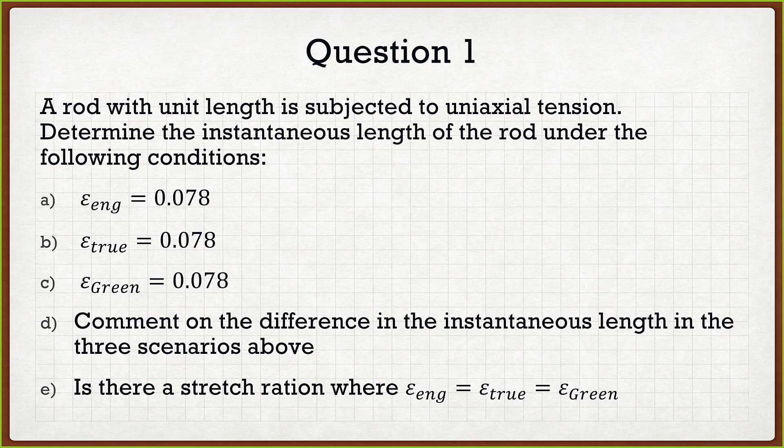And then finally, E says, is there a stretch ratio where all 3 strains are the exact same? So we're going to go into the formulas and try and figure out, is there a scenario where this holds true? The best way to do that is just to look at each strain measure. So for the engineering strain, it's going to be lambda minus 1.

For the true strain, it's going to be the natural logarithm of lambda. And for the green strain, it's 1/2 lambda squared minus 1. So if we look here, it's actually a simple question because in all 3 of these formulas, we're given the strain and our only unknown on the right-hand side is lambda. So all we need to do is solve for lambda using these 3 different formulas.

The only trick you have to be aware of in exams, because it's not going to apply here, is that lambda is our stretch ratio. It's not our deformed length, okay? The question's asking for the deformed length, not the stretch ratio. So what we would do is find lambda, and now that we found lambda, we can find its current or deformed length, because lambda is simply the current length divided by the original length.

Now in this question it's nice because since our original length was 1, it's a unit, our stretch ratio lambda is actually just going to be the same as the deformed length. So all you guys need to do in this question is figure out lambda and then figure out the deformed length, but since it's a unit length, they're going to be the exact same. So how does that sit with you? Is that pretty good? All we have to do is find lambda, and that's basically going to be our answer for A, B, and C.

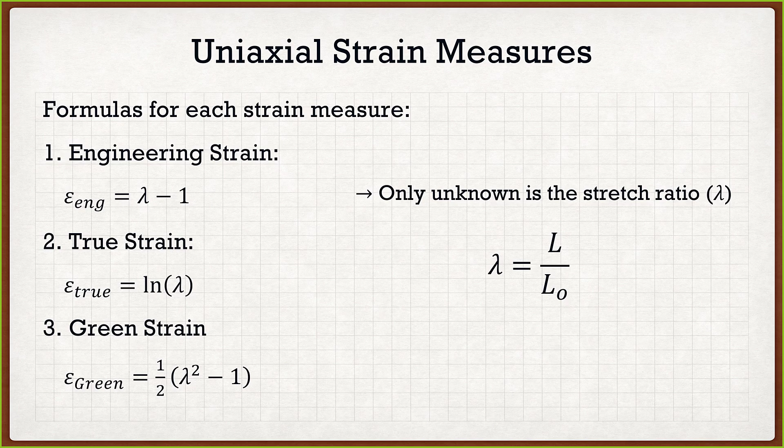So yeah, that's going to be the one and only case. That's going to be question 1. Any questions or concerns with question number 1? Or are you feeling pretty confident? No, looks good. Perfect. So let's go to question 2.

Question 2 has the trickiest question in the entire assignment, but after that, it's pretty simple. Question 2 says a cube undergoes a deformation such that the infinitesimal strain is described by, and as we can see, we have a second order tensor, or a 3x3 matrix. Now, whenever you see the word infinitesimal strain, it's the exact same as saying small strain. So my small strain tensor, that's the same as my infinitesimal strain tensor. It's just a different word for it.

And from this strain tensor, it wants us to determine 4 different things. The first one is the principal strains and their directions. The second is the longitudinal strain along the direction of the vector dx, which is 1, 1, 1. The approximate change in angle between the vectors dx and dy, which is -1, 1, -1. And finally, the coordinate transformation matrix Q that transforms our small strain tensor into a diagonal tensor, or a diagonal matrix.

So before we get into B and C, because those are going to be the tricky ones, let's look at A and D. They both have to do with principal strains. Now, my question for you is, what exactly are principal strains? Principal strains, principal stresses, they're all related to something very important that we talked about lots in our linear algebra. Do you remember what it is?

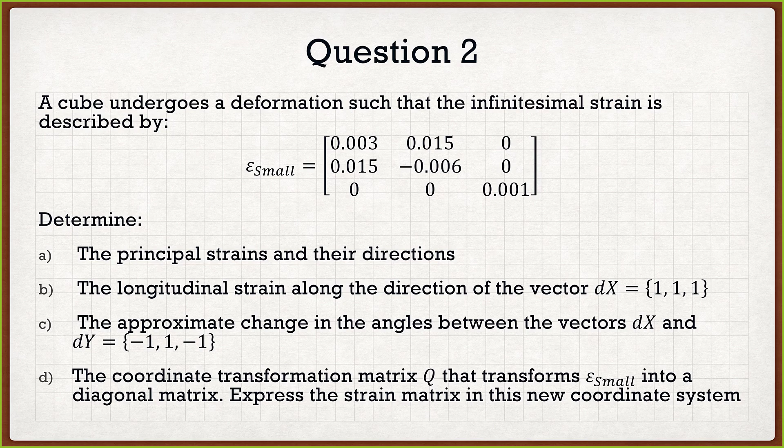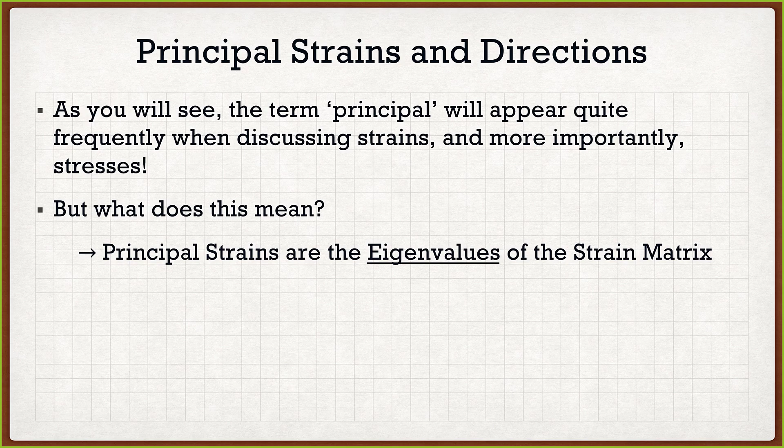So first of all, principal strains and directions. Again, whenever you see principal, you're going to see a lot with stress too, not just strain. It always means that we're trying to find the eigenvalues, always. And the direction of these principal stresses or principal strains, those are going to be our eigenvectors. So again, every time you see principal, eigenvalues, always.

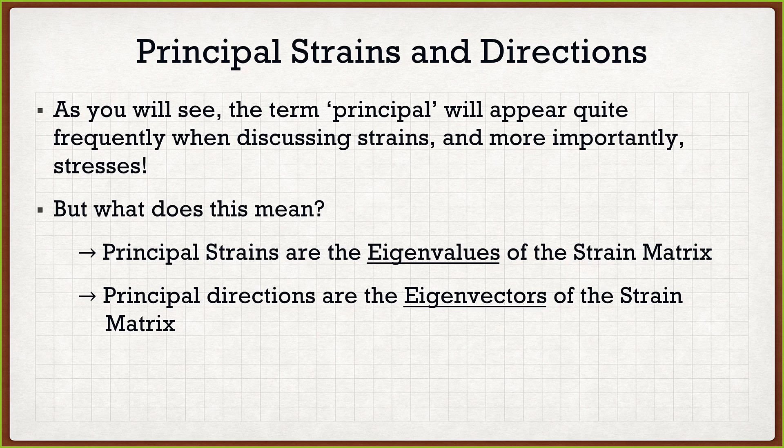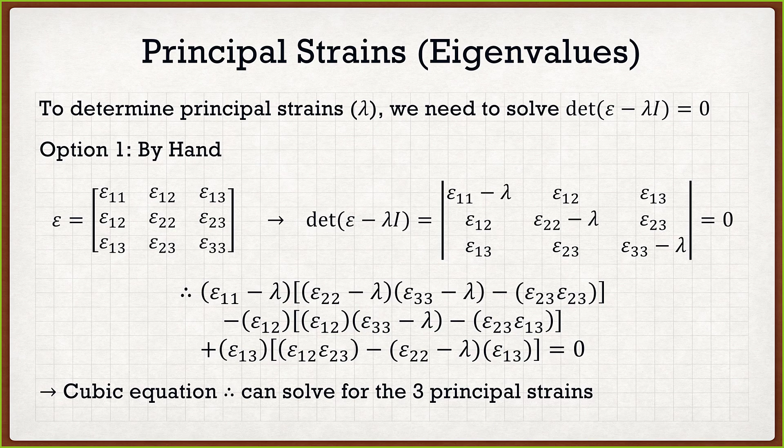How do we do that? We talked about it in all the other seminars, so I'm just going to go real quick. We're basically solving the equation, the determinant of, in this case, epsilon minus lambda I is equal to 0. This is if you want to do it by hand. Chances are you're not going to do it by hand, so what we do is just go into Mathematica and go eigenvalues. It'll give us our three values. Those will be our principal strains.

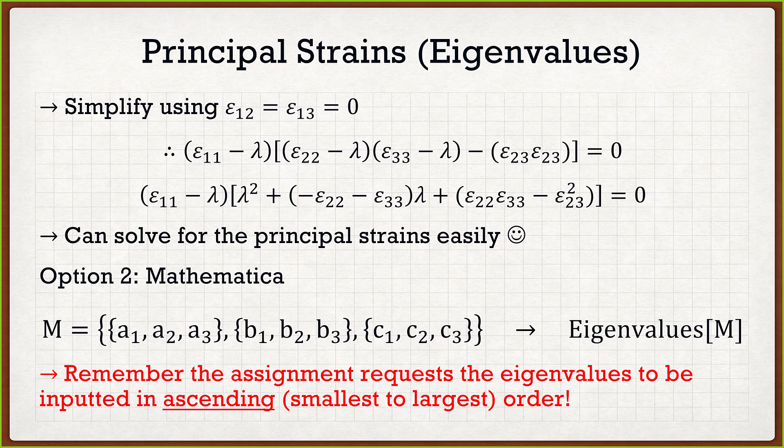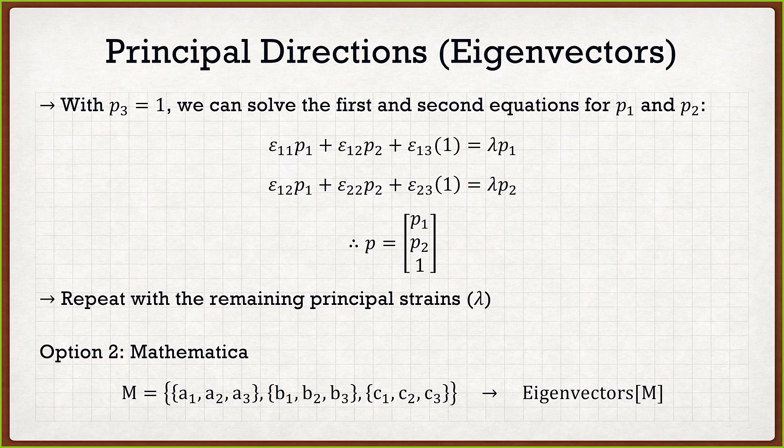Now for the eigenvectors, again the same thing. We're just going to go to Mathematica, type in eigenvectors, and then we have our three eigenvectors. It's nice and easy. Now where this becomes a little bit more tricky is going to be in part B. So part B says, okay, I gave you my strain tensor, it's a 3x3 matrix, and it wants the strain in a very specific direction, in the direction of vector dx. So keep in mind that dx right here, it's a vector. Now if we look back to our theory in our lecture notes, we have this formula.

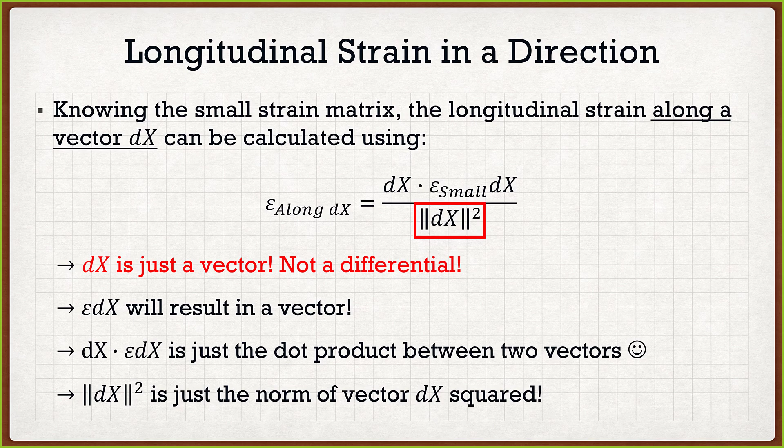So my question for you, because this is one of the harder ones: how are you feeling about part B? I gave you dx, I gave you E small. Can you find the strain along dx? You think it's pretty doable? Yeah, looks good. Wonderful, let's go on to the next question.

This one is going to be the trickiest. So what basically happens is we're looking at the change in angle between two vectors. Now this is hard because students have trouble visualizing what's going on.

So let's say I take a plate and I'm compressing it, deforming it. Now if I had two vectors inside the plate, as you can see in the webcam, after I deform the plate those two vectors are going to either get squished or pulled further apart. The angle between these two vectors, once I start deforming my plate, is going to change.

The whole point of question C is saying, all right, how much did it change? What is the angle by which it changed? Now if we look at the lecture notes, we didn't actually derive this formula because it's really long and gross. So I just gave it to you guys.

Three things. What's nice is we already know what the small strain tensor is. We know dx because that was from the previous question. And the only thing we don't know is dy. But if we actually look at part C, I gave you what dy is. So on the right-hand side, we know absolutely everything.

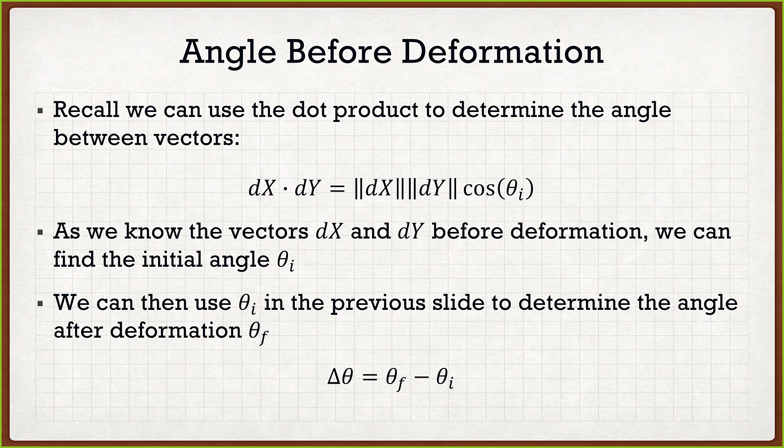Now, there's one thing that caused students some trouble in the last assignment, and that was this: when you get eigenvectors in Mathematica, they're not normalized, because eigenvectors, the idea of them, they're just a direction. It doesn't matter if they're normalized. But once we substitute them into Q, if Q is what we're interested in, our eigenvectors have to be normalized. So here's the trick: Q is an orthogonal matrix, so once you get your eigenvectors in Mathematica, you have to normalize them before we put them into Q.

The reason why is because a rotational orthogonal matrix has a determinant of 1. If the eigenvectors are not normalized, the determinant will not be equal to 1. So we have to normalize them to make sure the determinant is equal to 1. Again, all you have to do for this question is find the eigenvectors, normalize them, and then throw them into Q. Is there any questions about this, or is that also not too bad?

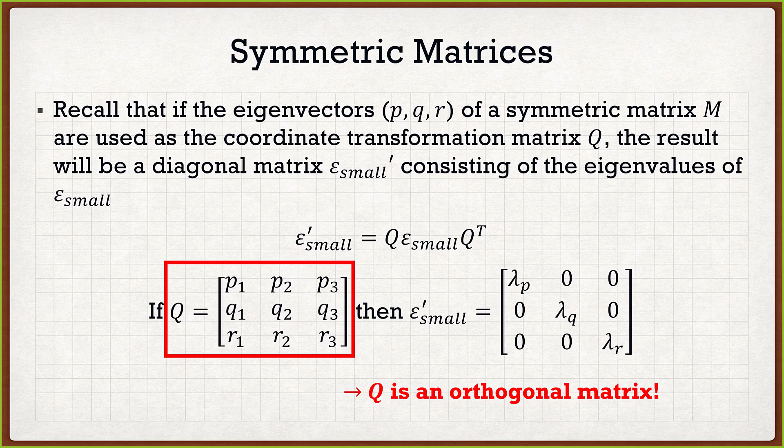No questions? Wonderful, wonderful, perfect.

Let's go on to question 3. Now, I'm going to warn you, it's going to look pretty bad, so don't get too scared, because at the end of the day, this will be maybe 6 lines in Mathematica. Looks bad, but again, 6 lines in Mathematica.

So it says, consider the plate in the figure below. I didn't personally put the plate in, but there's a picture of a plate. And it says the displacement function of the plate is described by, and it gives us U1 and U2. So again, U1, U2, and U3 if applicable, those are our displacement functions.

Basically, we want a lot of things with this question. The first one is determine the position function x. When describing motion, there are two different ways: displacement functions u, or position functions x. There's a nice relationship between the two, so that's not going to be too bad.

The next thing the question wants is a lot of different components. If we look at A, B, C, and D, they basically want the small strain and green strain components. That's it. So if I know my small strain tensor and I know my green strain tensor, I can answer everything in all four of these questions.

So far, the only thing we need are position functions, small strain tensor, green strain tensor. And if we look at the last two questions, it wants a vector plot of our displacement function and a contour plot of our small strain tensors. Now, the reason why I want these plots is this.

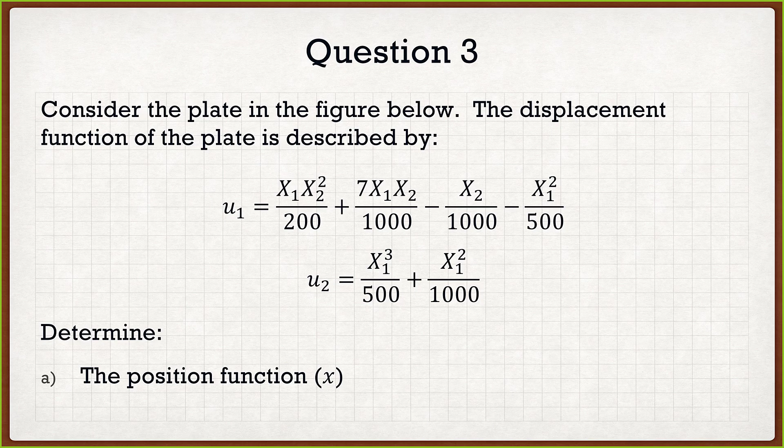It's nice and colorful. You can figure out a lot of very nice things from it. So we're going to talk about how to do those things. The first one was the position functions. We said that position functions and displacement functions are related very nicely, because here's the formula: my position function x is equal to big X, which is our initial point, plus u, which is our displacement function.

So if we look here, the only unknown that we really have is that big X. We know what u is, we were given u in the question. So if we were to expand this in vector form, x1 and x2, the two position functions that I want, are going to be u1 and u2, which we're given, plus big X1, big X2. The only trick is always remembering that big X1 and big X2, it's always going to be the same. They're not a variable that you substitute into. It's always just big X1, big X2.

So for part A, where it wants the two position functions, all you have to do is add a big X1 to u1 and then add a big X2 to u2. That's it. It's actually very nice and simple. It almost looks too simple that you become really sus about it, but it's actually as simple as it looks.

Now, moving on to the next part, we said that we can answer all of the questions if we know our two strain tensors, our small strain tensor and our green strain tensor. Well, what are the formulas for them? Our small strain tensor is 1/2 of nabla u plus nabla u transpose, and our green strain tensor is 1/2 of nabla u plus nabla u transpose plus nabla u transpose multiplied by nabla u.

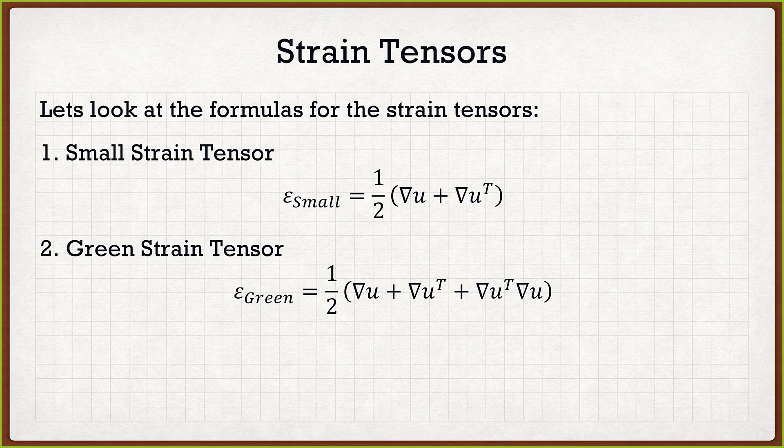What do you think? The u, exactly. So once we know what nabla u is, we have the entire question basically answered, because all we need is that displacement gradient. How do we find that?

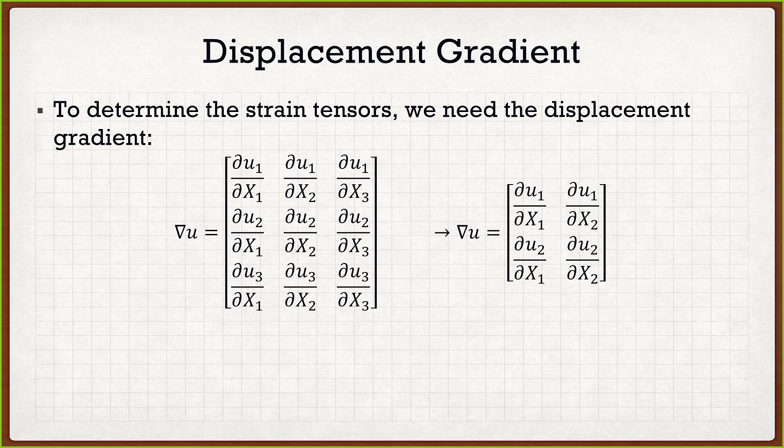Well, in 3 dimensions, this is the formula, but since we're in 2 dimensions, our formula is going to simplify. It's just basically the partial derivatives of u1 and u2 with respect to big X1 and big X2. So we can find those partial derivatives, and then we can carry on and find our strain tensors.

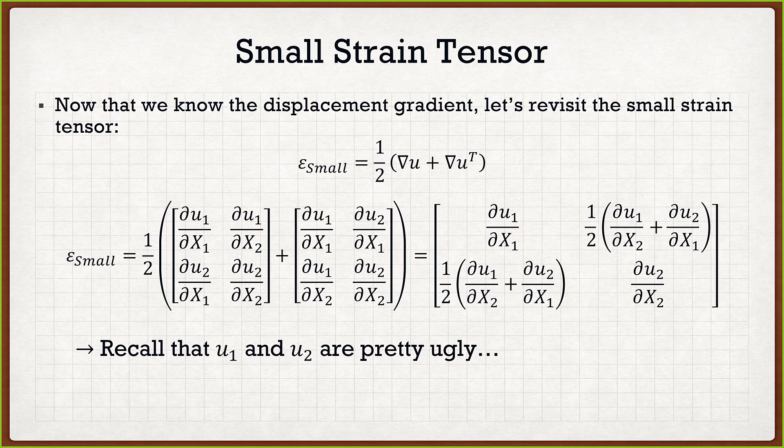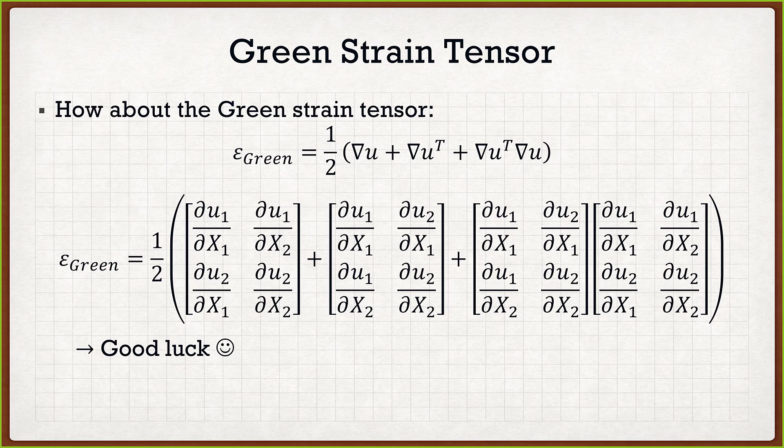So what we're going to do is we're just going to look at how to do it in Mathematica. Here's the code that's going to basically get you through the entire assignment. We're going to define u as a vector, u1 and u2.

Now u1 and u2 you will define before you do this. It's given to you right in the question, so you can just define it. After that, we're going to define the vector big X, which is going to be big X1, big X2, always.

Once we have these two defined, we can calculate that displacement gradient, that thing with all the partial derivatives, by using the table function. So I can say that grad u, that's my own personal way of saying the gradient of u, is equal to table, and then basically I take the derivative of u with respect to big X. That's all I do.

So if you just copy and paste this code directly, this will give you your displacement gradient. Nice and simple, because once we have that displacement gradient, we can find our strain tensors.

So in Mathematica, if I want to find the small strain tensor, I'm just going to use this code: 0.5 multiplied by the gradient of u plus the transpose of the gradient of u.

The trick comes in with the green strain tensor. The formula is the same, but at the end of the green strain tensor, we have matrix multiplication. So what we have to do is make sure that if we're doing matrix multiplication in Mathematica, we have to put a period instead of a star.

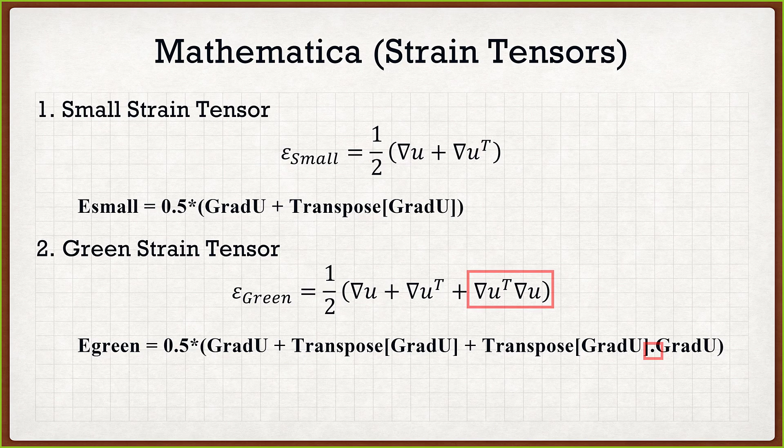Now the nice thing is once you run the code, you have your 2 tensors. But if we look at the question, it doesn't ask you for the entire tensor. It wants specific components, mainly that 1,1 component, the one on the top left.

So what we can do in Mathematica is we can actually call specific components. So if I wanted to call the component as a variable, and I define my green strain tensor as e green, I would just go double square brackets 1, 1. This will give me that component in terms of x1 and x2.

So again, the key here is all of our strain tensor components are going to be a function of x1 and x2. So if I were to call it just like this, it's going to give me x1 and x2 in the formula. So that's what you're going to want to do for the first 2 parts.

The second 2 parts say it wants the components again, but it doesn't want them in terms of x1 and x2. It wants them at specific locations. So if I know what x1 and x2 are, I can substitute them in to figure out what exactly the component will be as a single number.

How do we do this in Mathematica? All we have to do is go the same thing as before.

If I'm interested in component 1,1, I would go E Green, double square brackets 1,1, and then add this piece of code. I'm going to bring my mouse onto the screen so you can see, and all I have to do at the end to substitute my variables in is this right here.

Now this part right here, this slash period, is almost the equivalent of saying 'when.' What I'm saying to Mathematica is I want this component 1,1 when x1 equals 2 and x2 equals 4. That's all we're doing. So you find your component, say 'when,' and then specify the values of x1 and x2.

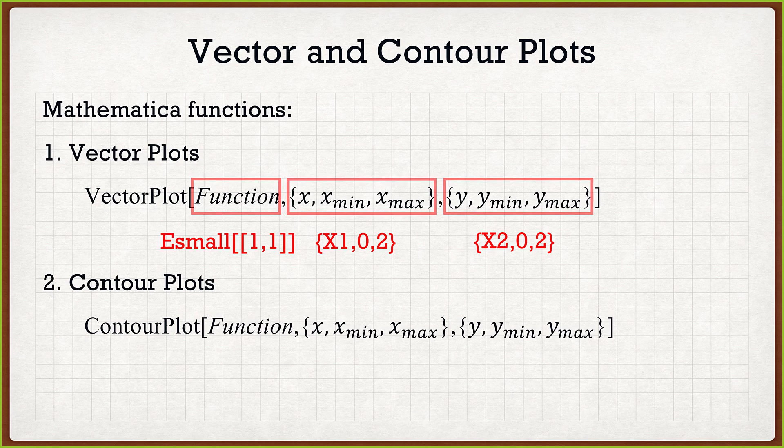This is the last one for marks. There's question number 5, but it's a bonus question. This is the last one for marks, and it is quite simple. When we talked about stress this week, we said that stress basically comes down to three formulas. You've got one for a traction vector, one for the normal stress, and one for the shear stress. That's all there really is to stress, so it's going to be nice and simple.

Question 4 says that the Cauchy stress at a point in a continuum is given by a nice matrix, and it wants us to determine three different things. The first is the traction vector on the plane passing through the point and defined by the equation 5x1 plus x2 equals c. The second is the angle between the traction vector and the normal to the plane. Finally, part C asks for the normal and shear stress components acting on the plane.

So if we remember those formulas, I don't expect you to memorize them, but if we think about them, they always had one thing that was kind of constant throughout, and that was our normal vector n. In order to find all of these things, we need to find what this normal vector is. The only piece of information we're given in this question is this plane equation 5x1 plus x2 equals c. I don't expect you to know this because it's kind of outside the scope of this course, but if this was our equation for the plane, what do you think our normal vector is?

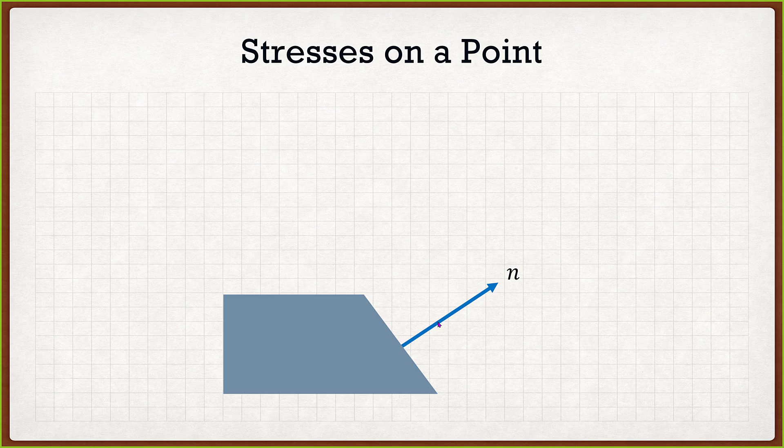So now that you know that, you have your stress tensor, and you have your normal vector. You've got both of them. If I want the traction vector, all I'm doing is taking my stress tensor, which we're given, and multiplying it by that normal vector.

Now here's the second part of this question that you have to remember. This is going to be the key. The normal vector, when we're dealing with stress, it always has to be normalized. Always. It's solely to define a direction. It's not an actual vector, it's a unit vector. So that vector you said, 5, 1, 0, that is correct for the direction.

But before you throw that into this formula, you have to normalize it. So that's the second trick. You find 5, 1, 0, and then you normalize it. After that, you're good to go. You take n after it's normalized, and just throw it into this equation.

You have your traction vector. If you want your normal stress component, all you're going to do is take your traction vector, which you solved for above, and dot it with the normal vector. That's it. And then finally, for the shear stress, you take your traction vector, subtract the normal stress multiplied by that normal vector, and then take the norm.

So if we look at the top one, we're taking a matrix and multiplying it by a vector. What do you think the result will be, a scalar or a vector? It's actually going to be a vector.

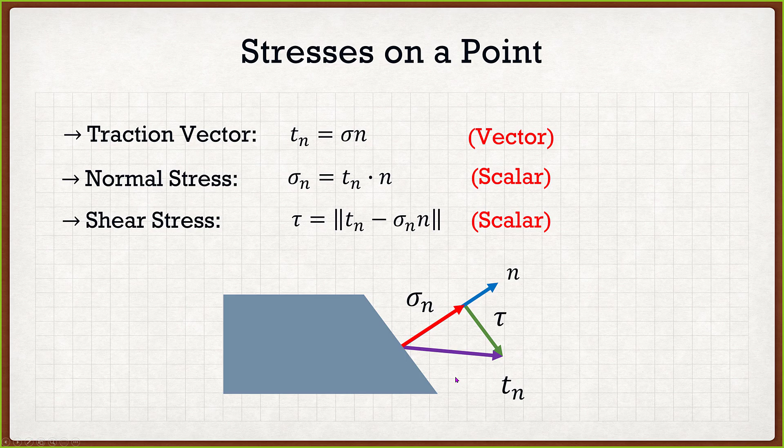It's kind of like thinking of this right here, going down the plane, as our x-axis, and in the direction of the normal vector, this is our y-axis. If I were to give you this vector in that plane, saying Tn, it's almost the equivalent of saying what is the x component and what is the y component. In this case, our x component is our shear stress tau, and our y component is our normal stress sigma. Does that make sense? I'm hoping that it does.

Yes? Wonderful, perfect. So that's it for question number 4.

I'm going to go back because there's one last thing, and that is part B, where it says the angle between the traction vector and normal to the plane. Well, there's no real trick to this. You have the traction vector as a vector. You have the normal vector as a vector.

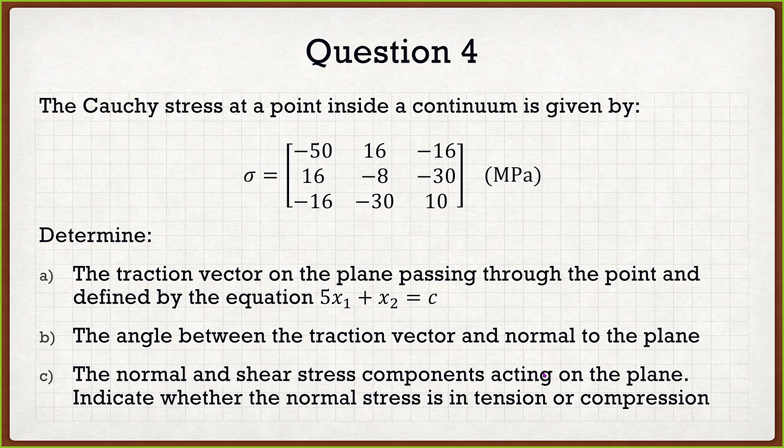If we have two vectors, we can find the angle using the dot product formula. So for that question, just the dot product formula. There's nothing special. I know it looks like there's supposed to be a trick, there's not. You just have to use the dot product formula.

All right, so last question, which is the bonus question. It's a lot of word garbage, but it's actually not too bad once you substitute everything in.

So if we look at the question, it says if sigma 11 is 1 MPa and sigma 22 is negative 1 MPa, while all other stress components sigma ij are equal to 0 at a point on a continuum, prove that the only plane on which the traction vector is 0 is the plane with the normal vector in the E3 direction.

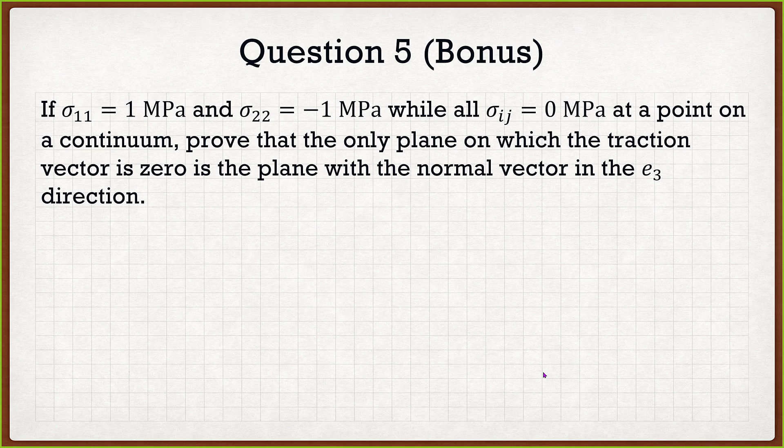Now again, it looks like a lot of words. It doesn't look like we're given a lot, but let's just take a look at it. Are we given our stress tensor? What do you think? Are we given it indirectly? Yes, we are. If we look at our stress tensor, sigma 11 is 1, sigma 22 is negative 1, and everything else is equal to 0.

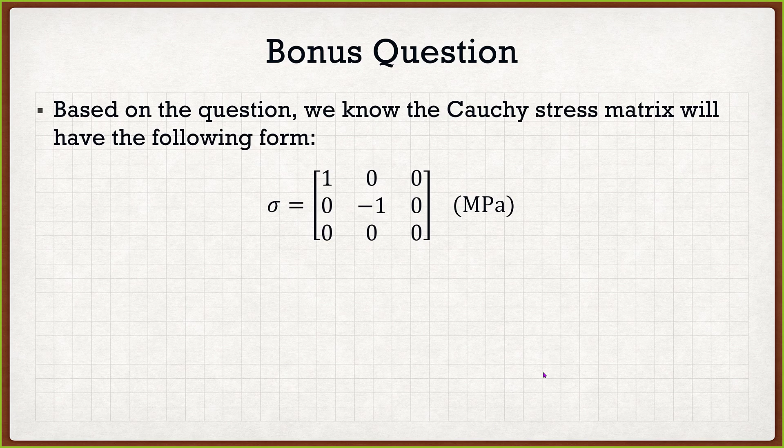So even though it doesn't look like it, we're actually given the entire stress tensor. The question also wants us to investigate the case where our traction vector is equal to 0. So we know our traction vector is just 0, 0, 0. We're actually given a lot of information. Now what's nice for us is we know there's a very nice relationship between the stress tensor and our traction vector.

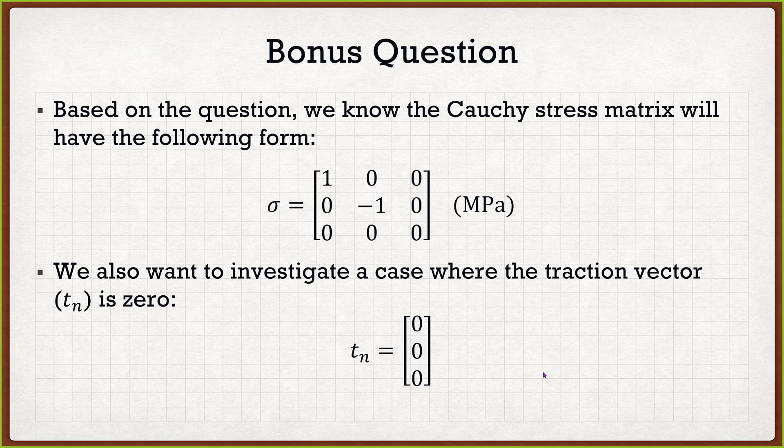That relationship is this: our traction vector is equal to sigma multiplied by n. So if I were to expand it out, we know that our traction vector is just a bunch of zeros, and our sigma is 1, negative 1, with everything else being 0. And the question says prove that the normal vector in this case is aligned with the E3 axis.

All right, it's aligned with the E3 axis. So if that's the case, and it's aligned with the E3 axis, what should N1 be? If our vector is going in the E3 direction, what should N1 be? Zero, exactly, see, you got this. If it's going in the E3 direction, what should N2 be?

If it's still going in the E3 direction, so it's like going only in the Z direction, is there going to be an X or a Y component? No, it's 0. So basically what this question wants is for you to take this formula and prove that the only way it works is if N1 is equal to 0, N2 is equal to 0, and N3 has to be 1. Realistically, N3 can be anything because it's just going in the E3 direction, but remember that for these normal vectors N, it has to be normalized. So therefore we would say N3 is technically 1, even though you can prove it can be any scalar - 0, 0, and any scalar.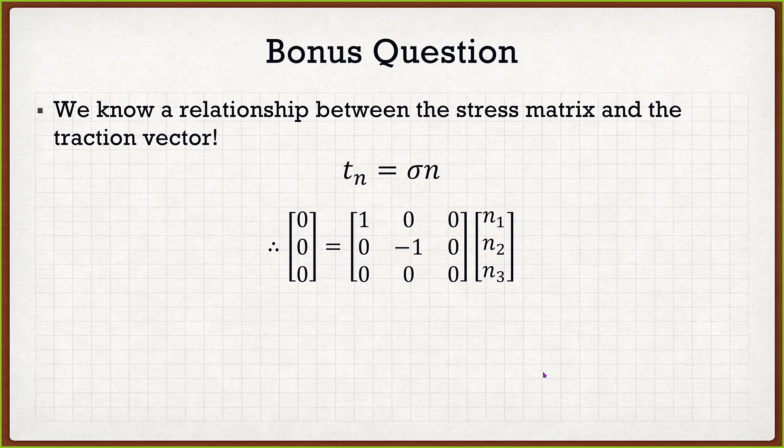And that's all the question wants you to do: for what values of n does this statement hold true? So you can just try playing around with it. As you can see, once you get your 3 equations, because that's essentially what we have, it becomes pretty obvious.